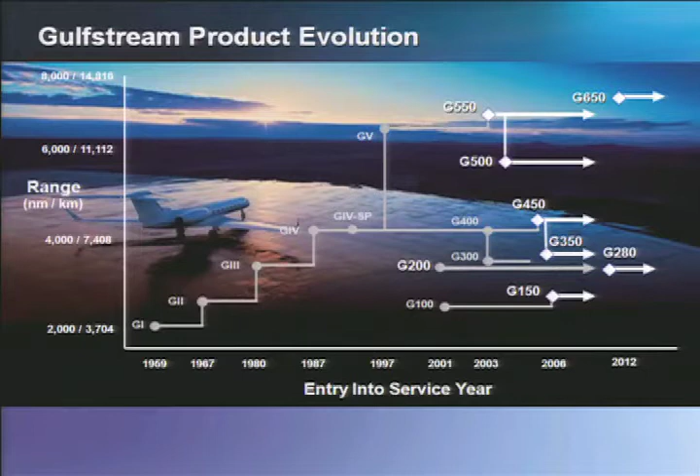The G4 was still selling well, and we have since become quite a diverse company. If you look at our product offerings now: the 150, the G280, the 350 and 450, the 500 and 550, and of course our latest and flagship aircraft, the G650, entering into service at the end of last year. The 650 really is a nice airplane and a much larger aircraft than the others, though it doesn't necessarily look like it there. We have a very, very nice range, and the airplane can really move. We cruise at Mach 0.85, but the aircraft will, it does pretty well. It can exceed that.

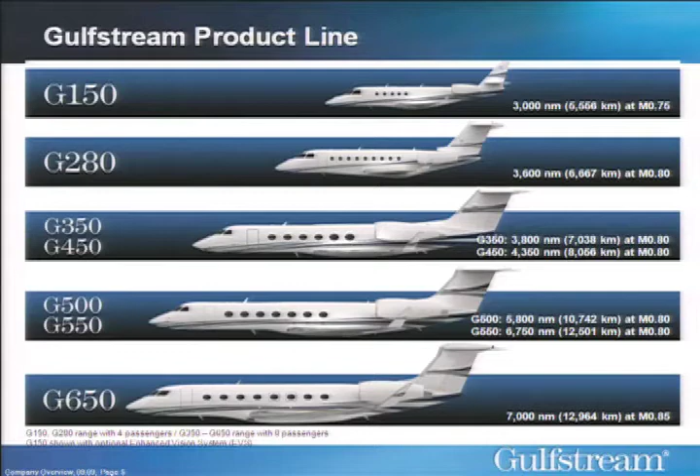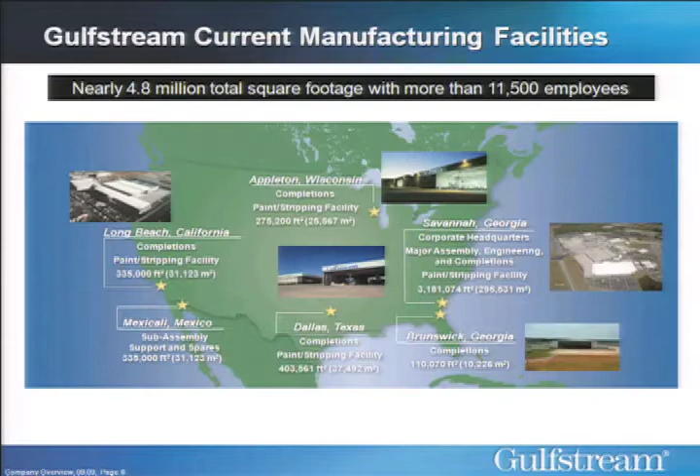If you look at our footprint in just the United States, Gulfstream has headquarters in Savannah, Georgia. You may notice the accent, but we have sites all around the country, outfitting sites and service sites, as well as a fabrication facility down in Mexicali, Mexico. In the last couple of years with some acquisitions, now we have service facilities scattered around the world.

Getting into the 3D model-based type design, we started this in our outfitting. Really, the schedule and pressure, we were really selling a lot of airplanes. And if you look at the way we outfitted airplanes, a lot of highly skilled craftsmen, tribal knowledge, the whole deal. We were constrained by the workforce as far as the skills go. We were selling airplanes, we could even engineer the airplanes and keep up, but as far as getting them out, we were really getting hamstrung. So we needed to come up with a different way of doing business, a different business model.

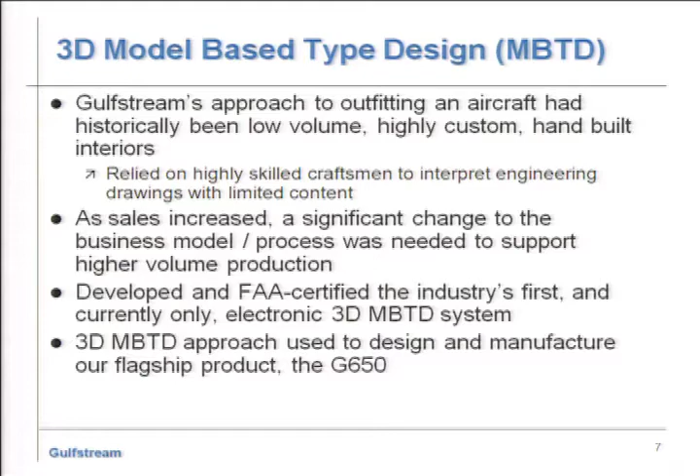So we went into an effort to try to enter into an agreement with the FAA on this model-based type design. It took several years to get through, but that is where we came up with the processes and the plan to integrate as we went into the G650 and the entire program. That 650 program was our first, Gulfstream's first clean sheet of paper design. All the other aircraft were iterations, if you will, of the previous airplane. So the 650 was our first shot at a clean sheet, and we wanted to make sure that we were in a position to use these new processes.

So what is 3D model-based design? It is a true electronic representation of the aircraft, including everything from fasteners to the hardware and veneer inside the airplane. I mean, every bit of it is modeled.

And what we do from there, our group, the PLM group, is make sure that we take that representation and leverage it downstream to our manufacturing and service, the procurement, and even out into our customer base. So it really relies on geometry rather than text. There are no dimensions on our models.

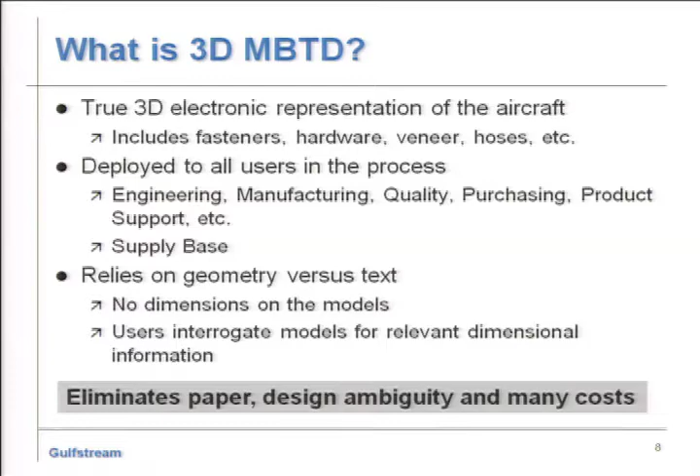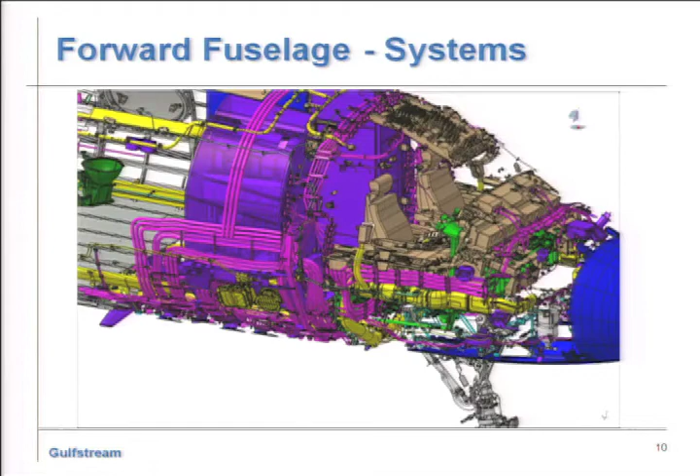So the end users interrogate the models for whatever they're looking for. If you look at a couple of quick shots here of a forward fuselage of the 650, you can drill in a little deeper here. You can see the complexity just at this level. And it's interesting when I look at the high-speed computing aspect of what we do and what we need to do moving forward, that the things that are slowing us now are in your guys' space.

Quick shot of the aft fuselage and the tail.

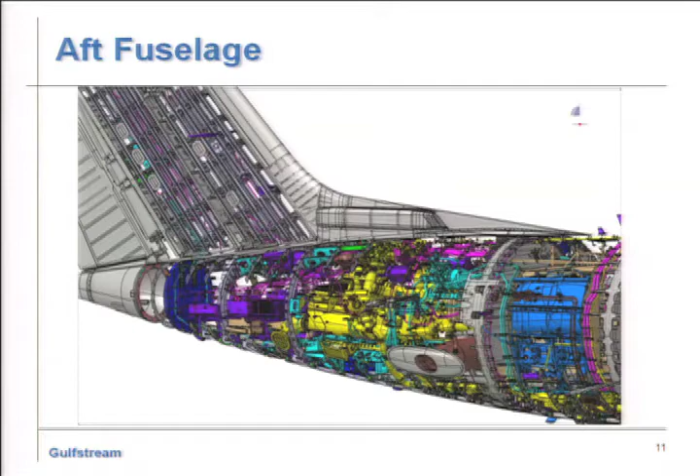One of the things we were concerned about as we began on this journey was, would the guys on the floor, the mechanics, the people in procurement, would they be able to come up to speed and understand how to not only interpret - now we were leaving the paper world and using manufacturing execution systems. We actually use, I'll just put a plug in for Solumina, we use that as our MES. But not only train those guys in a new MES system, but have them go in and interrogate our CATIA models and understand what they're looking for and get the particulars out of that.

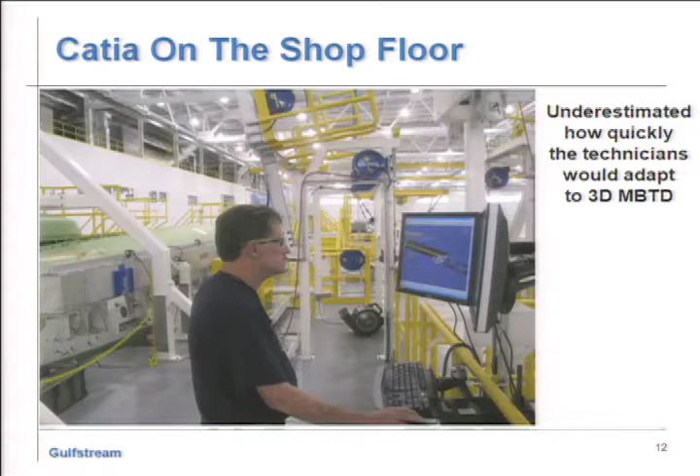And we really underestimated those folks. Not only did they think it was cool, they really grasped what they needed to do for their particular parts of the job, and they picked it up pretty quickly.

One of the things when you think about key initiatives here with 3D model-based design, and this may, especially for any of the manufacturing folks in the room, not be any earth-shattering news - standard parts was a big initiative there. We had, on the 650 compared to the 550, a 50% reduction in part numbers on that airplane.

In outfitting alone, the old ways of outfitting our interiors on the 550 and the 450, we reduced the number of brackets and clips used to hold in our structure, our furniture, from in the neighborhood of 400 to 500 down to around 6. And if you understand that, you guys in supply chain management understand what that does for you. I see the Boeing guy shaking his head. Absolutely, that is a big deal.

Our configurations are maintained by aircraft in 3D. We can get out of our system on-demand BOMs. The end user anywhere in there can pull up the electronic copy of the engineering BOM. This really lends itself to being able to use a lot of NC programming and precision manufacturing on the shop floor.

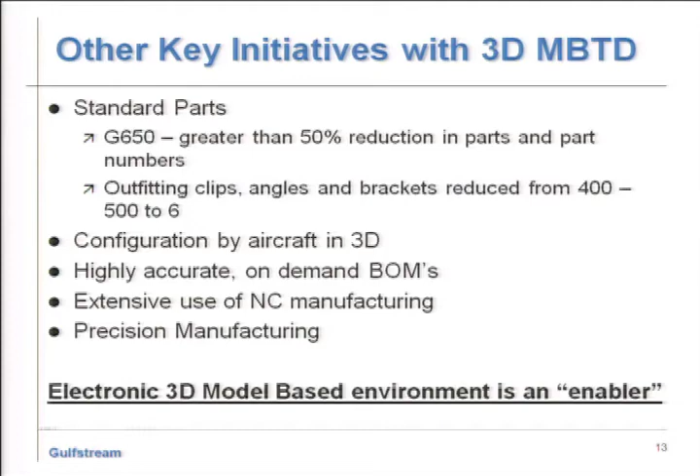We've got our new building and we've taken some small steps, I'll say, in the Gulfstream world into robotics. And we're actually feeding right out of these 3D models the information to that. So really making some strides in our manufacturing processes.

When you go into the electronic world, especially in aerospace, we really need to maintain our data for 50 to 75 years. What is the life cycle of that aircraft? So in order to do that, what are the things you've got to consider?

As we go through our processes and solutions, if you will, we have to make sure that we can get our data regardless of software, hardware - we know that changes like the wind. So we need to be able to get our data, our IP, back out of that long term.

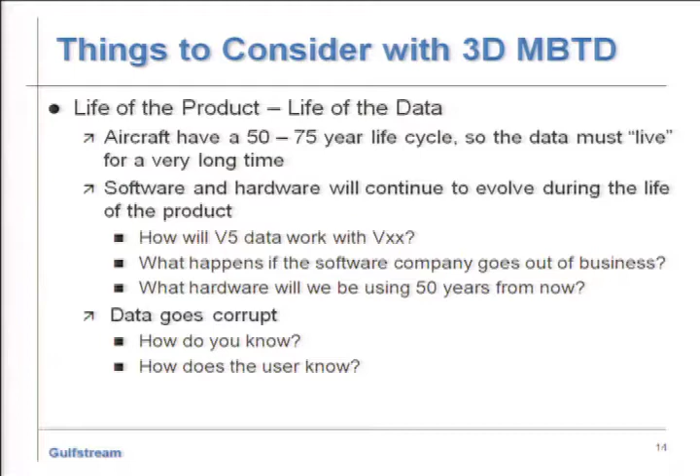How do we know if data goes corrupt? How do the users know? How do we convince - we actually have an agreement with the FAA to design and manufacture our airplane in this space. So we had to convince those guys that we had that covered and had solutions that would handle that. So when you look at what we do, just at a top level, we check our data every night. We go through every bit and byte of that data so we know the next morning we have our reports ready. If anything's missing, if anything's corrupt, it's addressed immediately.

When we look at upgrades, we just came through an upgrade of our CAD tool, and that took us about 1.5 years to go through and do the proper, if you will, metadata and geometry validations and everything required to move that data from just one version of the same tool. I think we went from R19, excuse me, to R22.

We're preparing now for the next version of our CAD tool upgrade as well. So it takes a good while to go through and do that, but all of that stuff is documented and in agreements with the FAA in order for us to maintain our business process in this way.

When you look at what it takes - and we were talking just at the break around international standards - we spend a great deal of time trying to influence what standards are around this, to make sure we can push the software vendors as much as possible as they're coming out with their tools, so that we can maintain and move our data from one spot to the other, from one tool to the other.

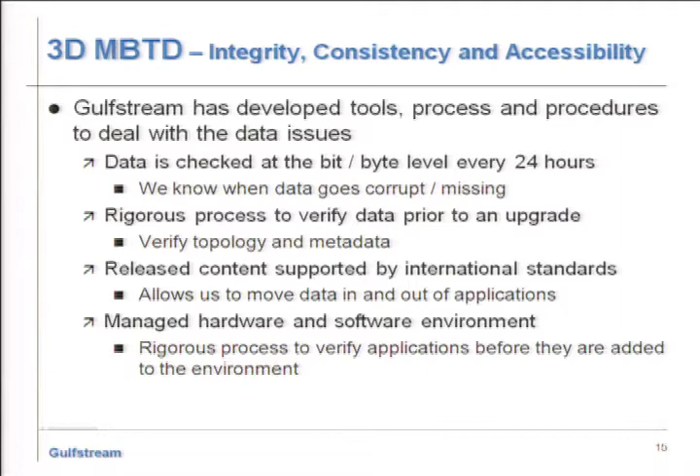When you look at the applications before they're added to the environment, historically at Gulfstream, somebody could call the IT folks up and say, hey, I found this nice, neat software, I want to try it. They would go buy it, put it in, and you wouldn't hear from them again. Now they have to come to us and go through a tough testing process to make sure there's no long-term impact to the data.

When we look at the impacts to the business, really we don't build solutions. Gulfstream builds airplanes. We don't build IT stuff, we build airplanes. So when you look at what the impact to the business is, that's what we really try to focus on as we go through our solution development.

We really reduced the total cost and cycle time of outfitting our airplanes. We were running around 12 to 15 airplanes a year just in the G4 and G5 hangars, and now we can run nearly 40 in a year, over the last 7 or 8 years coming through this. You look at the standardized parts, really a big reduction in our parts and part numbers.

I've got a few pictures here. I told you folks I was a manufacturing guy. When I hired on at Gulfstream, one of my first jobs on a Gulfstream 3 was joining this nose to that front barrel section. It took me and about 5 guys probably in the neighborhood of 3 days - I hate to tell you what we did, if there's any airplane people here, to get that thing to line up, to be smooth, to be all the things an airplane needs to be. It took about 3.5 days to put that barrel section together.

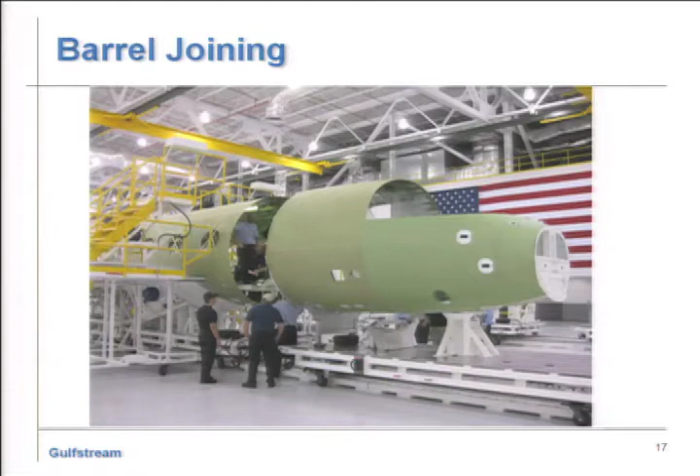With the 3D model-based design concept and precision manufacturing, these pieces - the nose was set on the joining jig, and we slid it together, and those guys had that airplane joined. This is the first one, in 15 minutes. They had all the holes lined up and ready to put the stuff in. I'm telling you, it blew my mind. I did not realize the impact that this was going to have on our business.

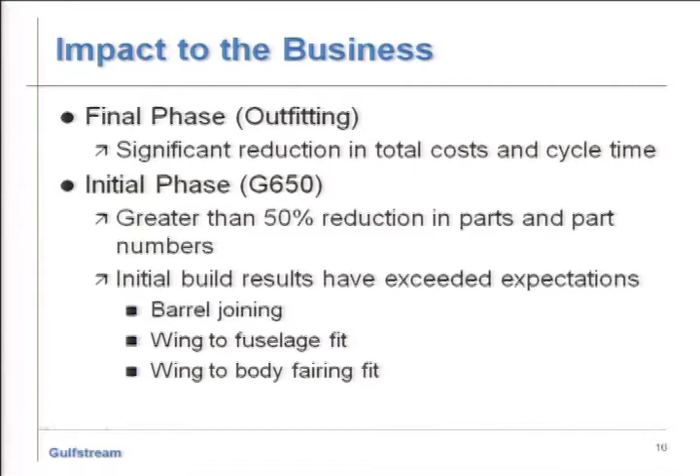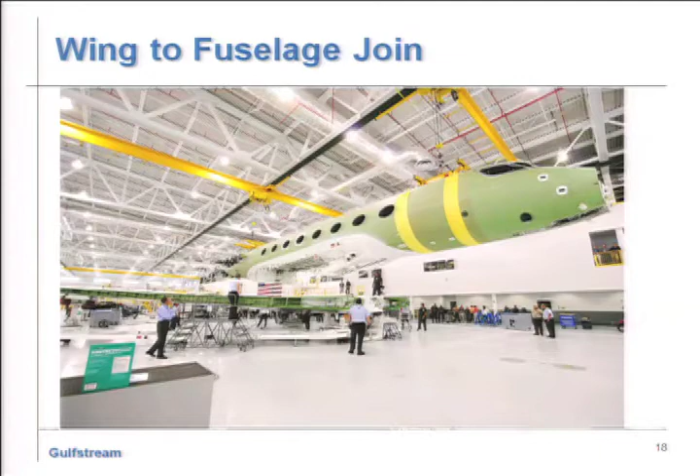It joined up beautifully. Wing to body fairings - our leadership was concerned here. Complex contoured composite surfaces - they worried that if there was going to be a hiccup in this philosophy of design and manufacture, we would find it here. These wing to body fairings, the gray pieces you see going on, we did not oversize the holes. We put pilot holes in, but every one of them lined right up. Really impressive - I'll say the guys did a great job with how this turned out, and we were full steam ahead then.

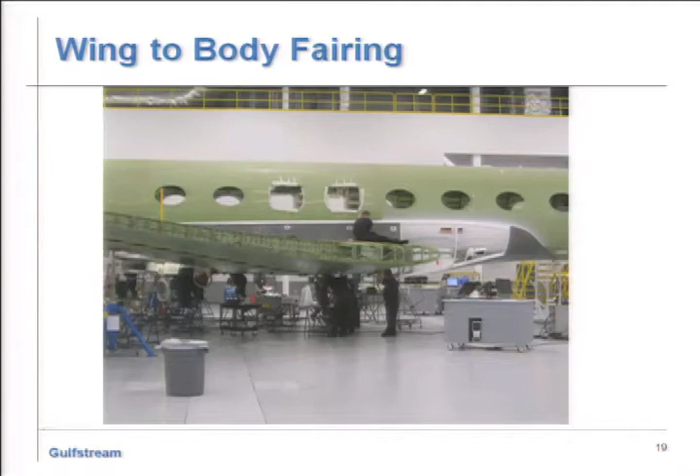So when I look at this, when you look at what 3D model-based design can do for you within a business model, you just got to be aware and make sure data, as you guys well know, is what you own. That's what you need to protect long term, and the hardware and software applications that support that have got to be in line with being able to do that.

I think I kept us a little ahead of schedule.

Questions for Charlie? Doug Ball. What a surprise! What a surprise, Doug Ball.

Okay, so now that you've got this full 3D solid model geometry for the airplane, have you used it to look at manufacturing issues? I'm thinking of access issues - can a mechanic actually, how much difficulty are they going to have getting their arm in there to install a bracket or a part or a piece of equipment?

Absolutely. And the corollary to that - so now we're looking at the human part of it - are you looking at this now as an enabler for figuring out how to put your airplanes together robotically versus manual labor?